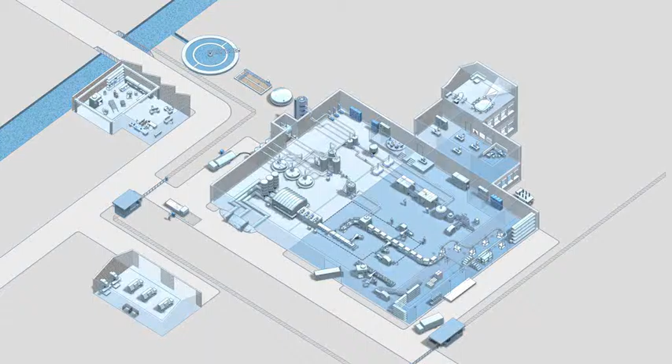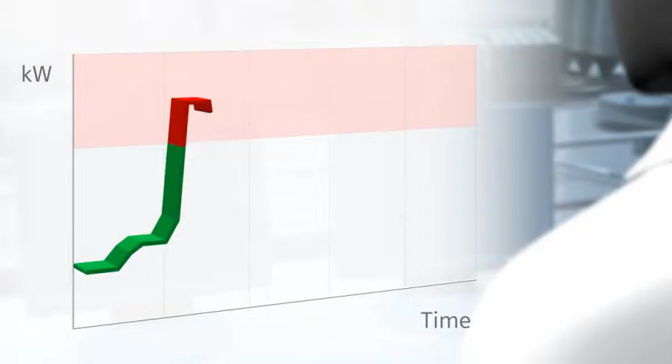Are your energy costs rising out of control? Wouldn't it be nice if you could simply switch off your energy consumption when it's not needed? Do you know where the energy-consuming loads are in your company? Every one of them, not just the big ones.

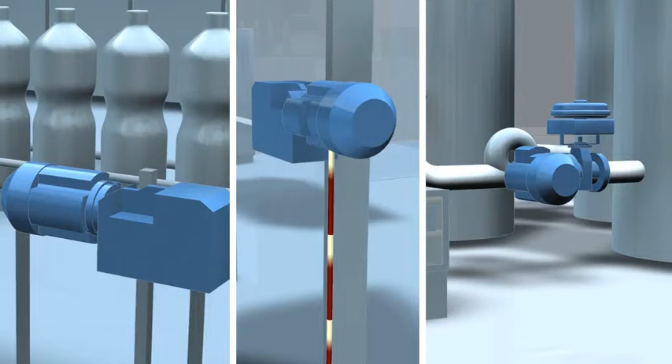Wouldn't you rest easier knowing where you could cut your energy costs by as much as 70%? Do you have control over your energy costs? Wouldn't it be reassuring if you knew what your electricity bill was going to be in advance?

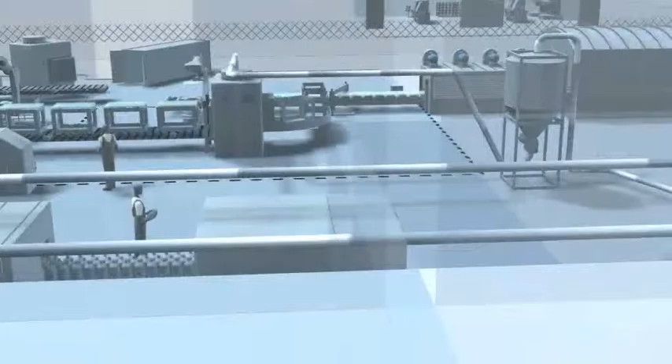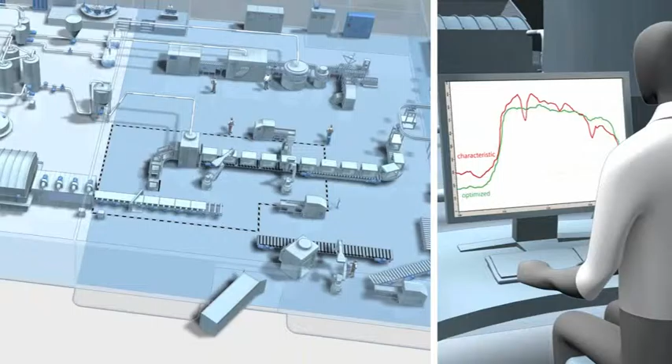With totally integrated automation, you can keep a constant eye on the energy consumption of your plant and find every opportunity to save energy costs. Do you want to know where you can save up to 70% of your energy costs?

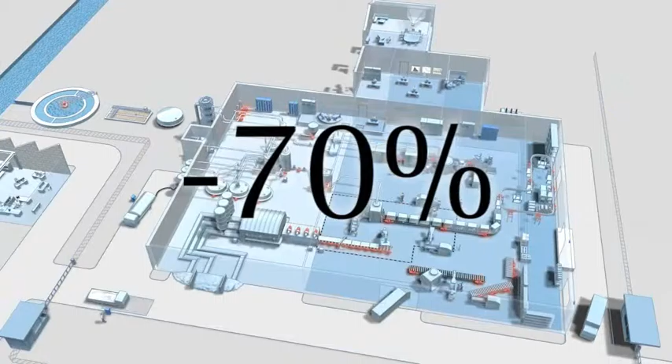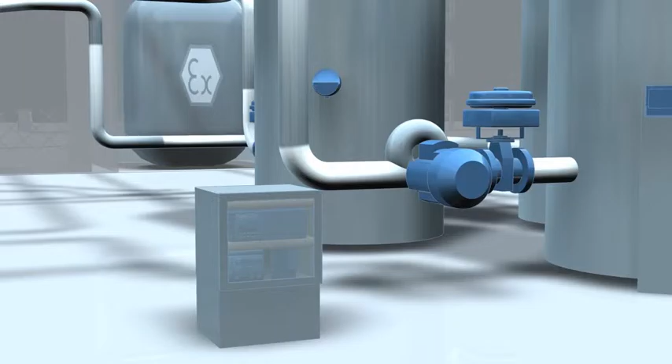Take a closer look at your motors. In industrial plants, it's the electric motors that eat up more power than anything else. Their operation often makes up more than two-thirds of your entire electricity bill. So put the brakes on your energy costs for motors right now.

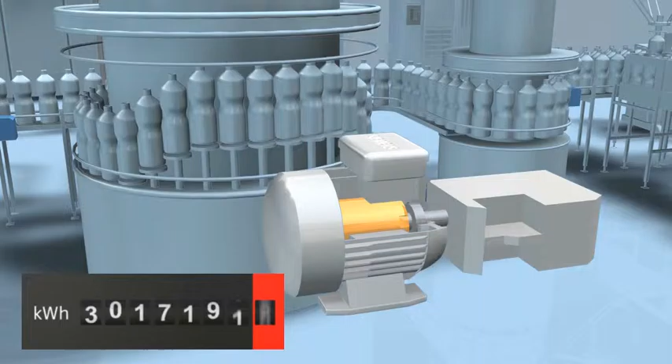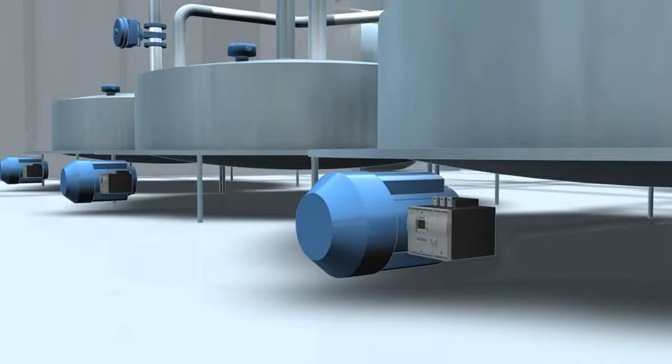Replace those power-eating electric motors with highly efficient energy-saving motors. 40% less energy loss will quickly translate into more savings on your electric bill. Operate your motors with soft starters and reduce the peak load by 60%.

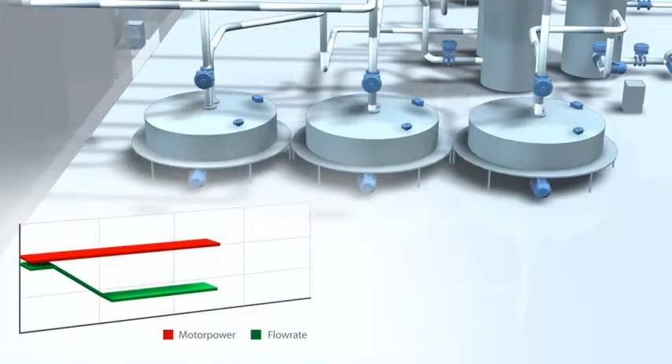Avoid using mechanical actuators and controls. Instead, rely on variable speed drives. Equip your motors with energy-efficient variable speed drives and reap power savings of 70%.

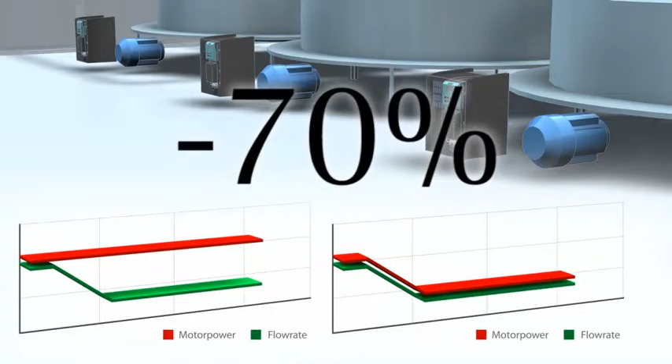Next, harness that valuable braking energy from each motor. Enable regenerative feedback capability on each variable speed drive and cash in on cost savings as high as 50%.

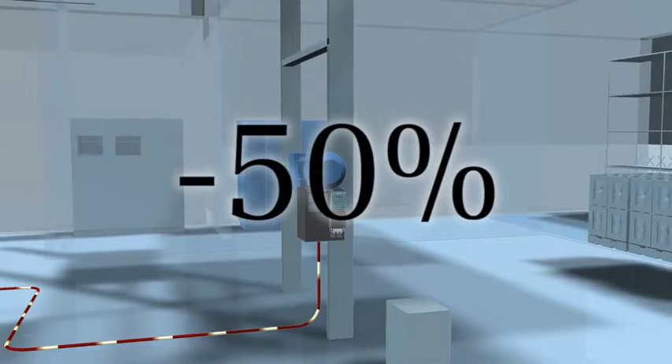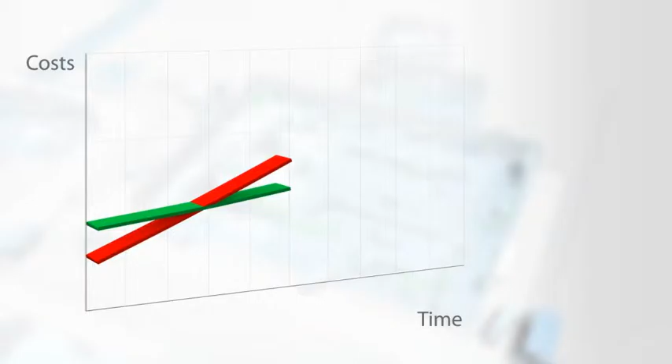Totally integrated automation will enable you to put the brakes on those costs created by your power-hungry motors. Why wait any longer? Your investment will pay off sooner than you think.

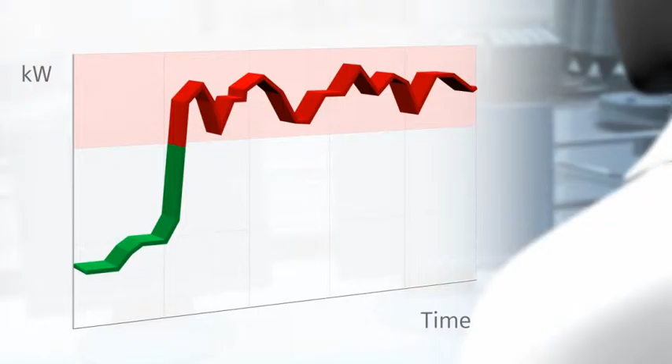Are you fed up with your energy consumption rising out of control? Then you should manage your energy intelligently. It's the only way to ensure that you never lose sight of your expected consumption.

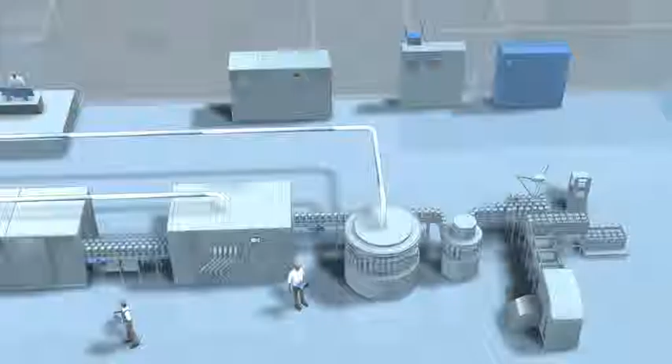Install power monitoring devices with communication capability directly on the load. Use switchgear and protection devices with integrated measurement function. Circuit breakers with communication capability show you how much current you are consuming in the whole plant or at each electrical circuit.

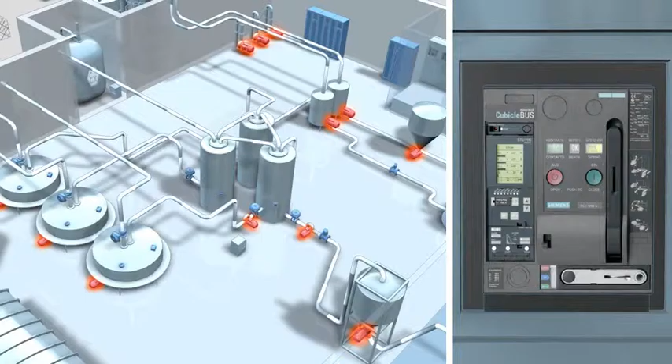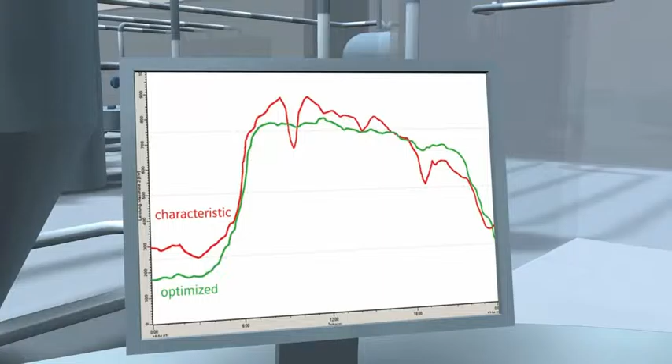And a universal communications interface lets you connect them directly to your control system, from the device level via connected controller to the automation and information networks. This way, you have all the latest information on consumption clearly laid out at one central location.

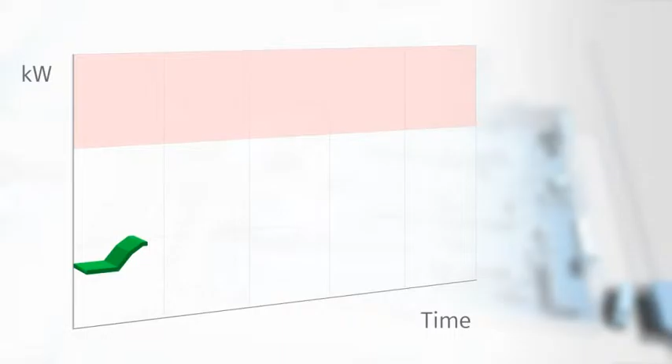The Siemens Power Management software integrated in the control system helps you achieve this. Put your trust in the intelligence of your power management system. And never again will you forget to plan in advance or to react in time

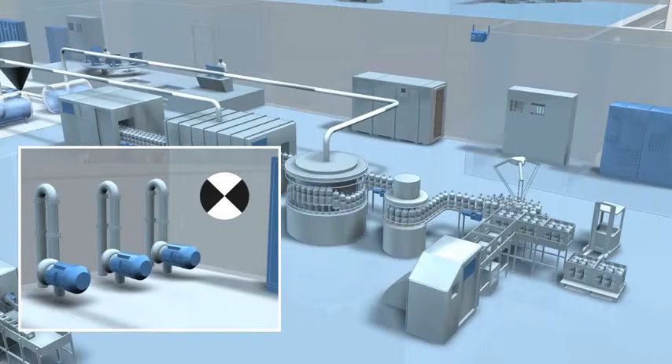without risking your production process. And how? Simply by switching off loads when you don't need them and switching them on when needed.

An intelligent automation controller does this for you. It communicates continuously with the connected drives and switchgear in the main production process and in the auxiliary processes, and recognizes which loads are important and which ones you can do without.

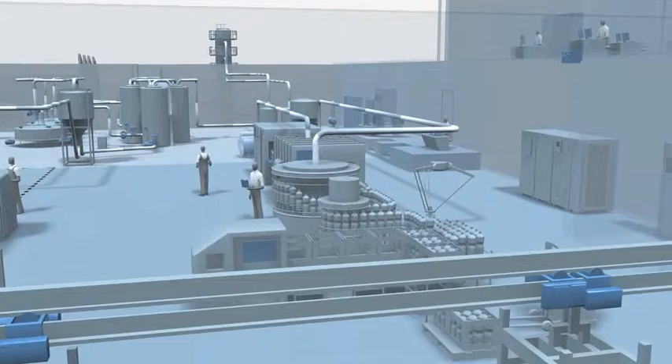Your current production process is therefore not affected in any way, and you have the certainty that your energy consumption is always most efficient. With totally integrated automation, you always have optimum control over your energy costs. The resulting energy use reduction of your plant will make itself apparent on your utility cost very quickly.

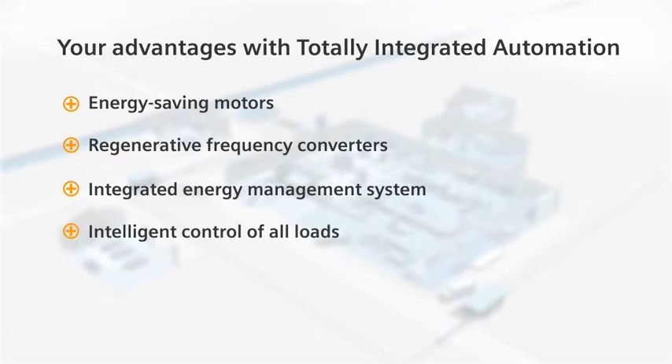Cut your energy consumption with totally integrated automation: energy-saving motors, regenerative frequency converters, and an integrated energy management system for intelligent control of all loads. Totally integrated automation for increased total energy efficiency.